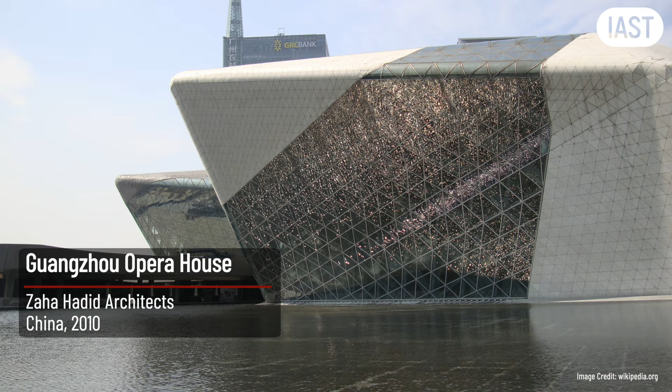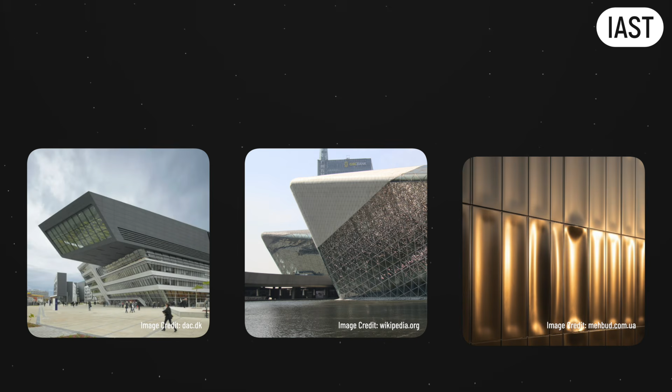75,000 granite panels. Within a year, panels cracking, joints leaking, thousands of cladding elements replaced. And this, a brand new facade buckling in the sun. No structural damage, nothing broke, but the client is furious and the contractor is back on site. Every one of these failures has one thing in common. Somewhere in the chain, a load was wrong, or missing, or misunderstood.

My name is Eugene Korch. I practice and teach facade engineering. And this video is about the loads that act on every facade and what happens when you get them wrong.

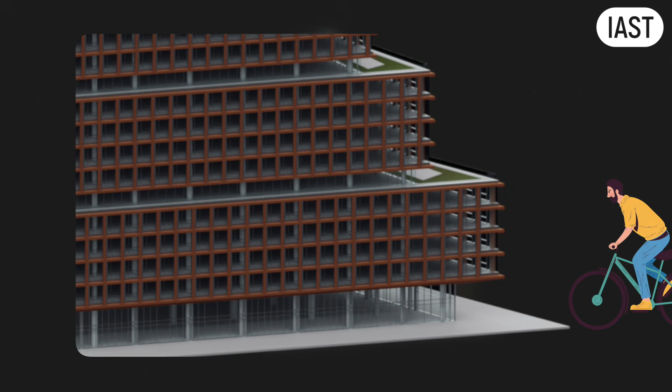Here is something that a surprising number of people on a construction project do not fully appreciate. A facade is not a passive skin, it is a structural assembly. It resists wind, it absorbs thermal movement, it deflects impact. It supports maintenance equipment, and it does all of this at once for decades, while keeping the building watertight.

The facade does not carry the building's load. The building frame carries floor loads, column loads, lateral forces, measured in hundreds to thousands of kilonewtons. A typical facade bracket carries 5 to 15 kilonewtons. The difference is at least a factor of 10.

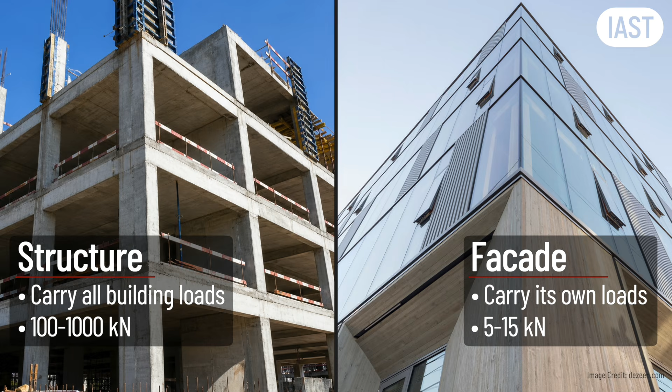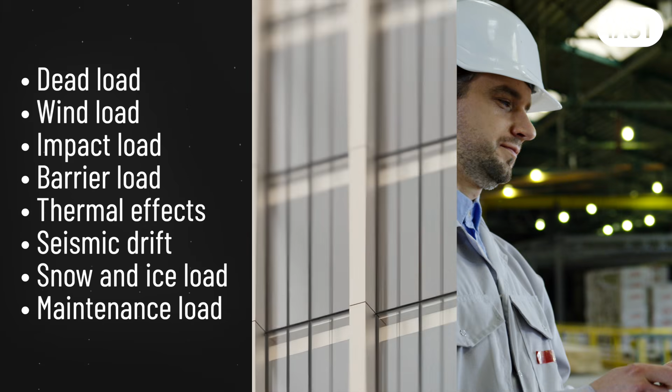But the facade carries its own loads: dead load, wind, impact, barriers, thermal effects, seismic drift, snow and ice, maintenance access, and several more. For every project, the facade engineer must review the full list and decide which loads apply and which do not. Missing one can mean redesigning the facade after it is built, and redesigning a facade after it is built is one of the most expensive mistakes in construction.

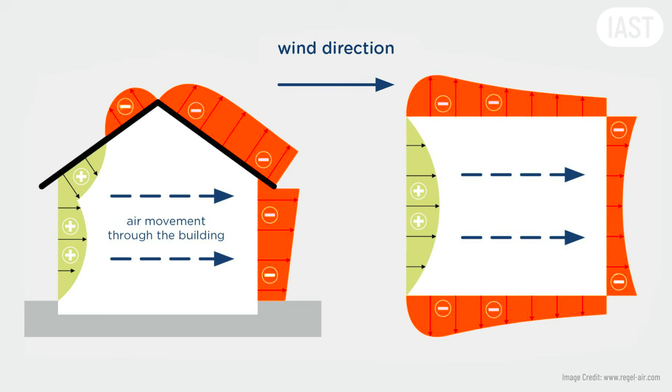Wind is usually the dominant load on the facade. It determines the size of almost every structural element, and it behaves in ways that surprise most people. When wind hits a building head-on, it creates positive pressure on the front face. That is intuitive. What is less intuitive is what happens everywhere else. On the sides, the back, and especially at the corners, wind creates suction. It pulls the facade outward, and the suction at the corners is significantly stronger than the pressure on the front.

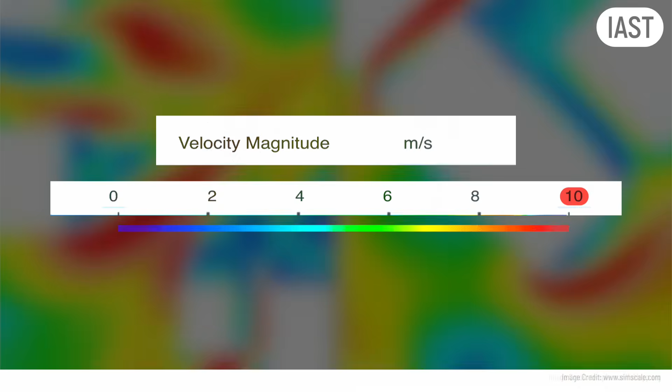Why? Because the wind detaches at the corners and accelerates. The faster it moves, the lower the pressure. Every fixing, every seal, every mechanical connection at the corner is being pulled outward, not pushed, pulled. And that is where facades fail first.

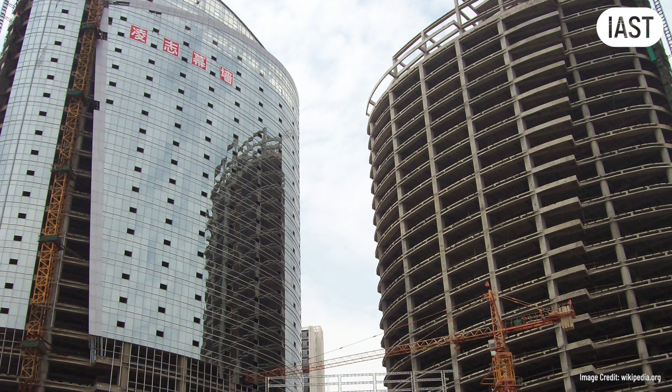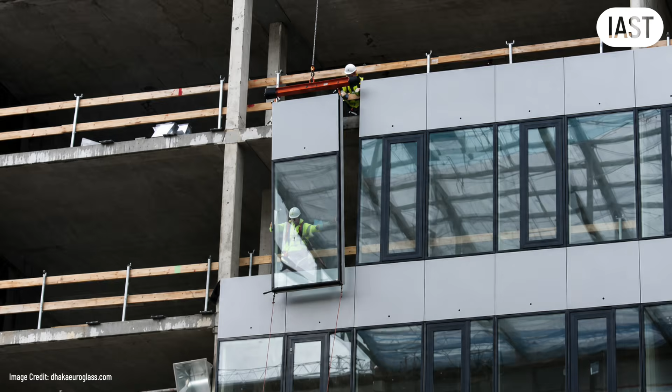Now here's something that catches people out during construction. A partially glazed building with an open loading bay on the windward side is temporarily a building with a very large opening. Wind pressure enters the building, adds to the suction on the opposite wall, and the net load on those panels increases dramatically. Panels that will be perfectly safe on a finished building can be at risk during construction when openings have not yet been sealed. The facade engineer must consider loads at every stage of the project, not just the completed building.

One more thing about wind. The code divides the facade into zones, each with a different pressure coefficient. Using the wrong coefficient for the wrong zone is a common and serious error. And the difference between the corner zone and the center of the wall can be a factor of 2 or more. Same building, same wind, very different loads.

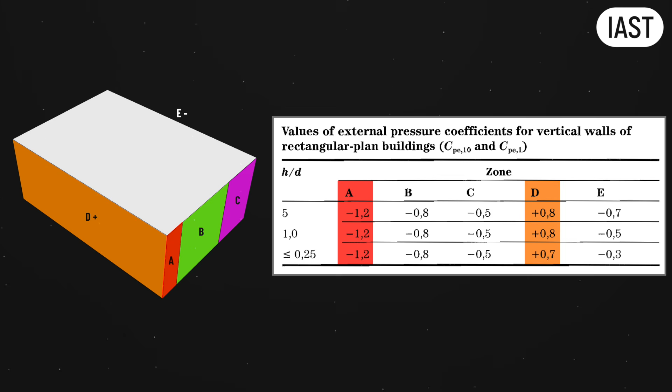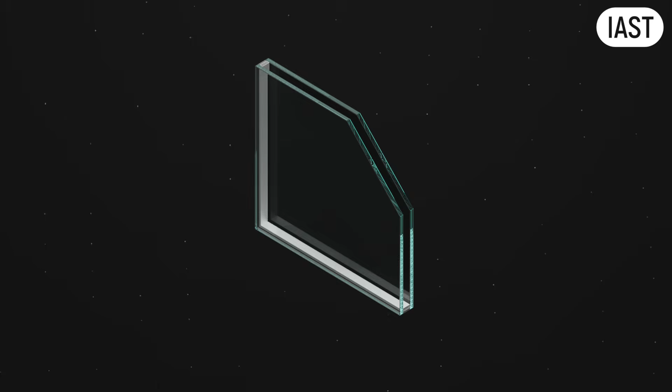Let me show you some more loads that get missed more often than they should. Dead load sounds simple. Everything has a weight. Add it up, but here's what actually happens on a project. The design starts with double glazing. An acoustic consultant says the noise level is too high. The specification changes to triple glazing.

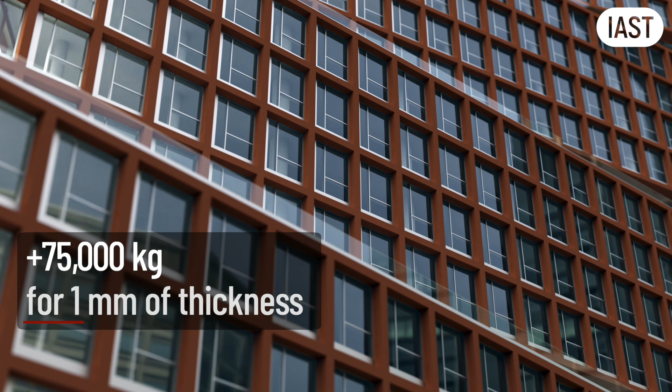Each additional pane adds roughly 2.5 kilograms per square meter per millimeter of thickness. On a 30,000 square meter facade, that is a significant increase in total weight. If nobody goes back and updates the bracket calculation, the brackets are now carrying more than they were designed for. This happens more often than you would think.

And this is not just design changes. A building is designed for specific loads in specific locations. An archive floor carries more weight per square meter than a standard office. When a tenant decides to swap those rooms around, move the filing into a space that was never designed for it, nobody on the facade team gets a phone call. But the slab deflects differently. The brackets are at the edge of that slab, and the facade feels every millimeter.

Floor-to-ceiling glazing. If a person can reach it and push against it, that glass is a barrier. It must resist a horizontal load representing a person falling or leaning into it. The load depends on the building use. A residential corridor has one value. A nightclub balcony has a very different one.

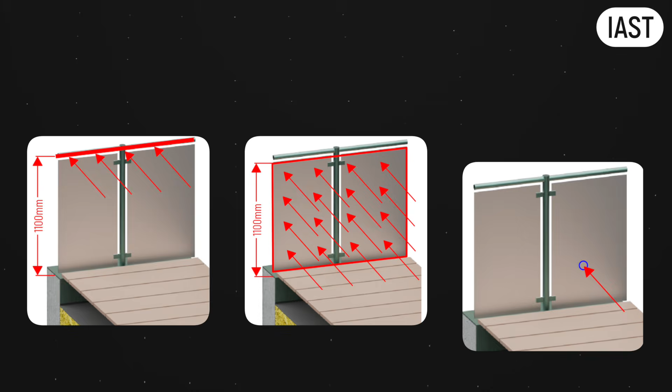And the check is not a single calculation. It is 3 separate checks that do not act at the same time. A line load at the top, a distributed load across the infill, and the concentrated point load at the worst position. All 3 independently. The element must pass them all.

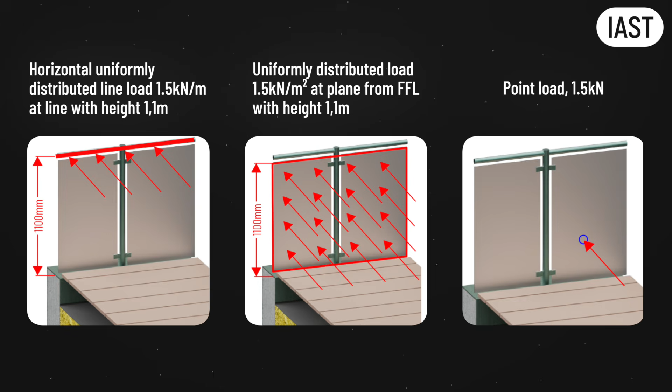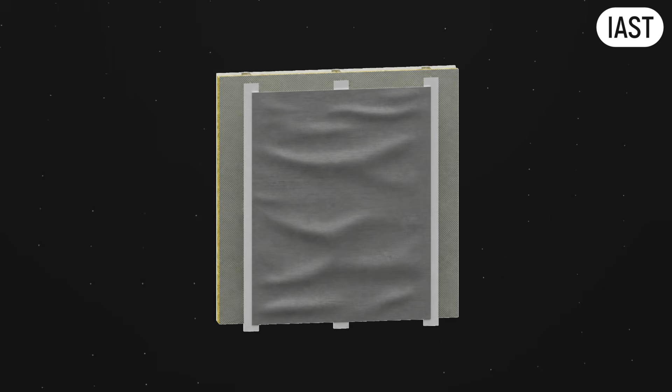Dark metal panels in direct sun. A black panel can reach 80 degrees when the air is only 35. That's surface temperature 60 or 70 degrees above the winter minimum. The panel tries to expand. If it is fixed at all four corners with no room to move, it buckles. This is oil canning, and it is almost always a thermal load that was not properly quantified, combined with a fixing arrangement that did not allow free movement.

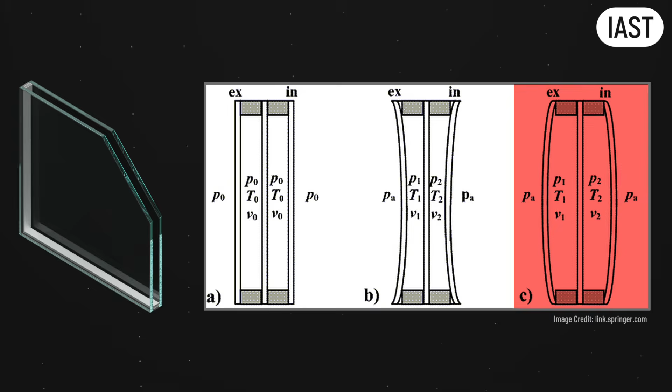And then there is one that most people outside facade engineering have never heard of. Let's look at sealed glass units. The cavity is sealed at a specific temperature and pressure during manufacture. When temperature changes, the gas inside expands or contracts but has nowhere to go. This creates a real pressure on the glass from inside the unit. If the unit is manufactured at sea level and installed at altitude, the lower external air pressure adds even more. This is a genuine load, not a movement, and the glass must be thick enough to resist it.

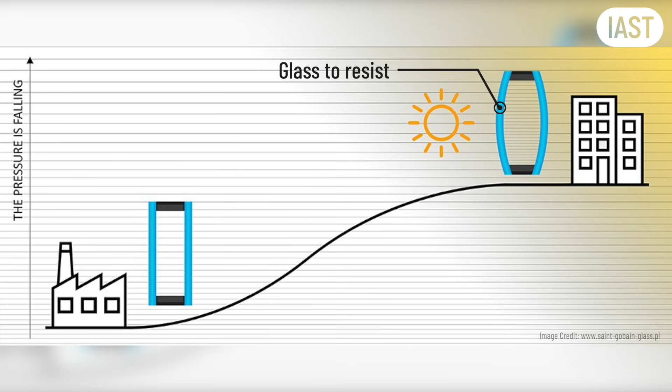And even if the glass does not crack, the bowing turns each unit into a curved mirror. The facade looks distorted. For the client, that can be just as much of a problem. This is only a 10-minute video, and we have only scratched the surface.

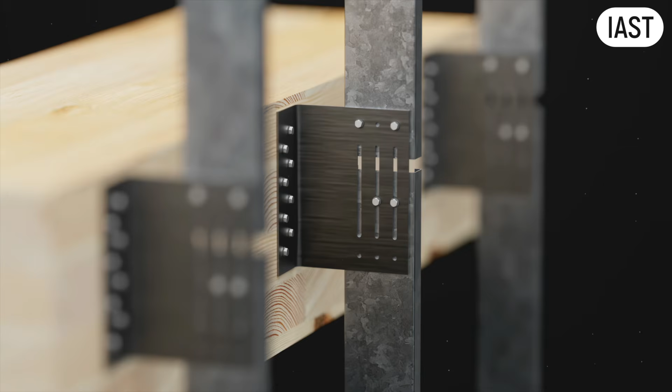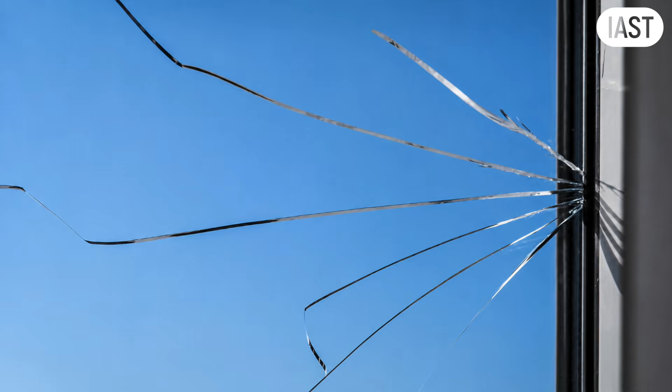A well-designed facade converts potential loads into harmless movement. The bracket slides, the joint opens, the gasket flexes. Nothing breaks. Get the movement strategy wrong, and those same movements become forces that can buckle panels, crack glass, and pull fixings out of the structure. That is the difference between a facade that lasts 60 years and one that fails in the first 5 years.

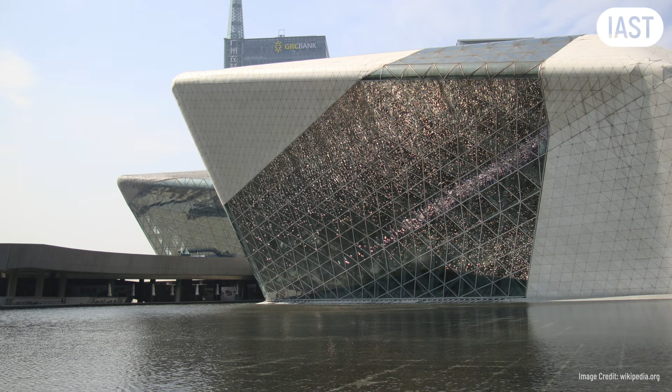Let me bring it back to where we started. An award-winning library with concrete falling onto the plaza, an opera house with thousands of panels replaced within a year, a dark facade buckling in afternoon sun. None of these buildings were designed by amateurs. None of them used cheap materials. Every one of them had a professional team, reputable contractors, and engineering consultancies behind them.

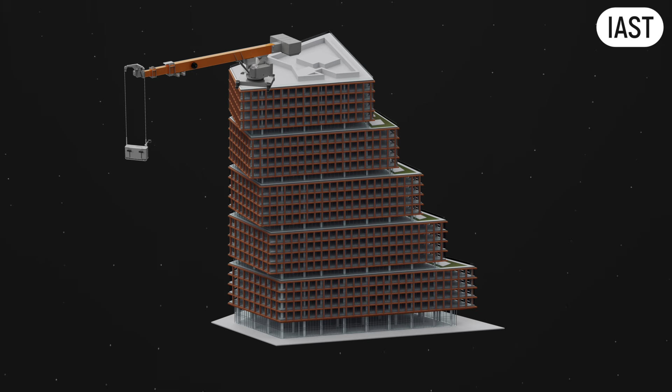The lesson is not that facades are fragile. The lesson is that loads are unforgiving. Every facade is a structural assembly, resisting real forces every day for decades. Dead load, wind, thermal, impact, barrier, maintenance, and more. Miss one, underestimate one, or fail to update the calculation when the specification changes, and the facade will let you know.